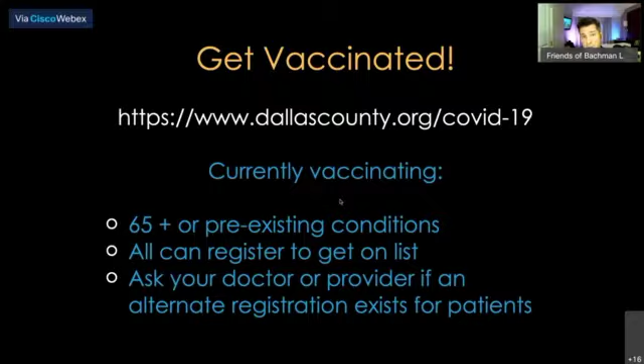Right now, people over 65 and with pre-existing conditions are on the priority list for vaccination, but everyone can go ahead and register to get on the list. Eventually, you'll be called to get your vaccine. You can also ask your doctor or medical provider if there is an alternate registration that they provide for their own patients. But you can not only just go on the website, there's also a phone number you can call for those without internet access or for those who would like to interact with a human being.

And that is 1-855-IMMUNE9. That's 855-466-8639. That is staffed from 7 a.m. to 7 p.m., 7 days a week in both English and Spanish. So again, that's 1-855-IMMUNE9 if you would rather get registered for a vaccination over the phone.

There are also what are called vaccine hubs being set up, and these can change from time to time. But this link here, which we will provide on the Facebook feed as well, will also guide you toward places in other counties and throughout the state, because you don't have to reside in the county where you get vaccinated. Dallas County and the city of Dallas are setting up different locations for vaccine hubs for people to get vaccinated.

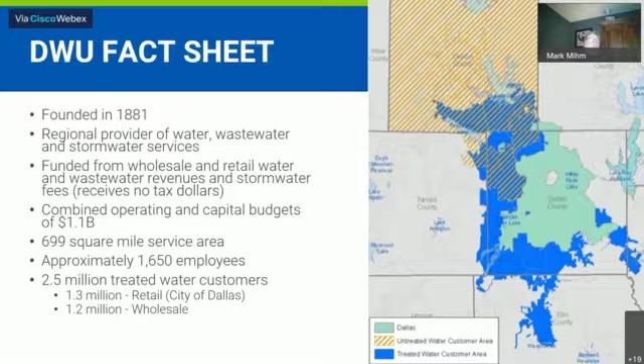The project team: Estella Ornelas is our community engagement specialist, and she's very vital on this project with getting the word out on our progress and what's going on. Mark Cottingham is my boss, a senior program manager with Dallas Water Utilities Water Facility Program Management. I'm a project manager in that group, my name's Mark Mihm. So the dam was built in 1901, a long time ago.

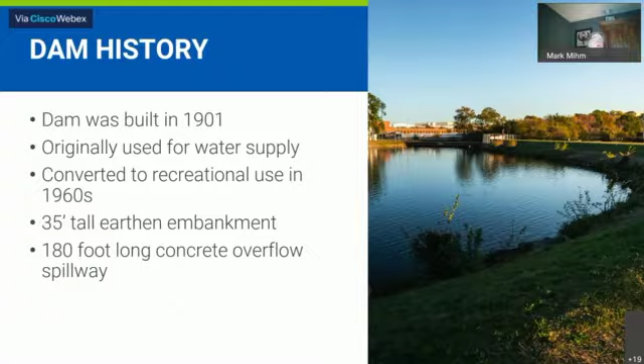Initially this was a water supply for a small growing community called Dallas. It was originally used for that, but was quickly realized to be undersized for the growing population. It was converted to recreational use in the 1960s. The earthen embankment of the dam is about 35 feet tall, with a 180-foot long concrete overflow spillway.

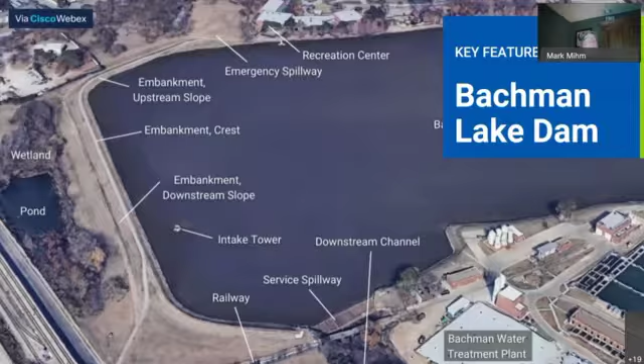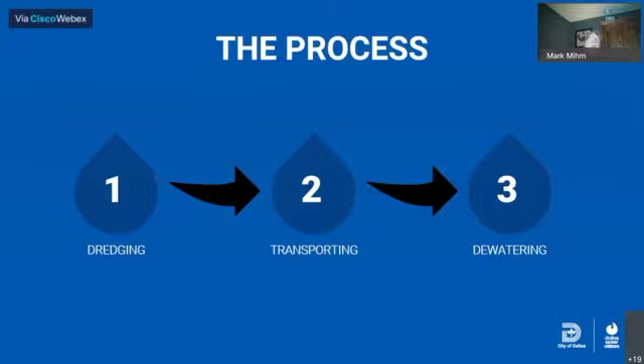So why are they important? First, let's talk about dredging. Dredging is a process where sediment is dredged up out of the bottom of the lake. It can be done several ways. The sediment is transported, dewatered, and finally transported again to a disposal site such as a landfill.

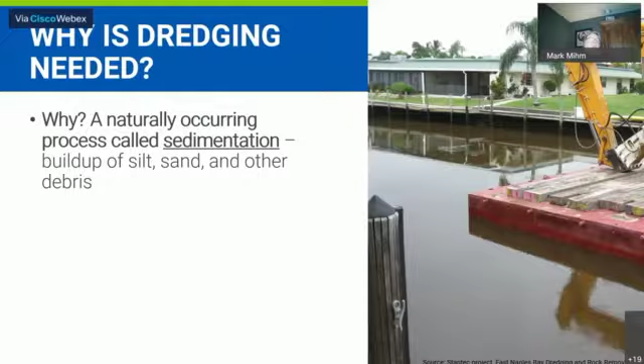Why do we need to do this at Bachman Lake? Well, creeks erode, and as you've probably noticed, our storms have been more intense, so erosion has gotten worse. And as development occurs, there's more impervious area, which means more runoff going to the creek. So it's an exacerbating issue. That sediment is transported downstream to where the water loses energy, and when that happens, the sediment settles out and builds up. And that's what's happening in the lake.

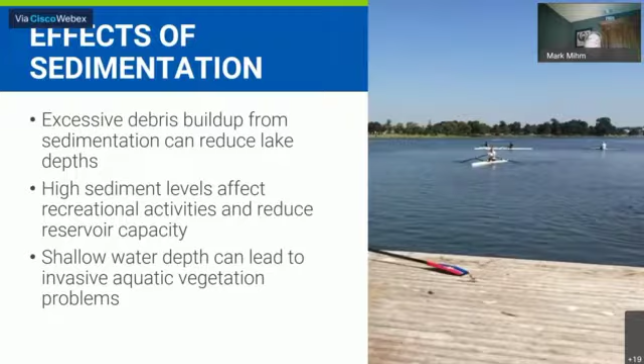So what are the effects? Well, it affects a lot of things. It affects recreation, because it reduces the level of the lake water. In fact, the lake can completely fill in if we didn't dredge it. There's high sediment levels that affect fishing and recreational activities, but also when you get shallow water, invasive aquatic vegetation can take hold, and that can be a real problem for lake maintenance. So we want to try to avoid that if at all possible.

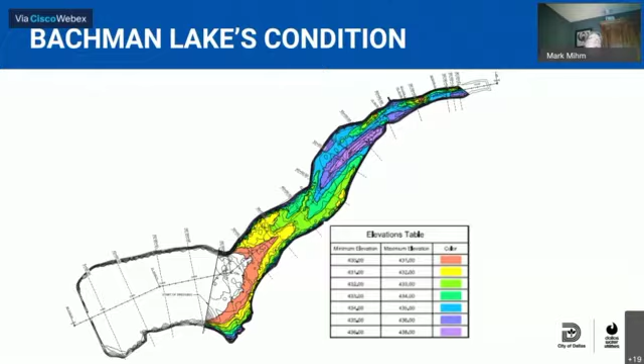Here's a slide that shows the water level depths. Where you see the violet or purple color, that's real shallow. In fact, that light purple is an island that's formed in Bachman Lake as a result of sediment buildup. It's mostly in the upper reaches of the lake where, like I mentioned, the water loses its energy of carrying the sediment and it sinks to the bottom. So those lines drawn on there are cross sections that we used when we surveyed the lake to determine how deep the sediment was.

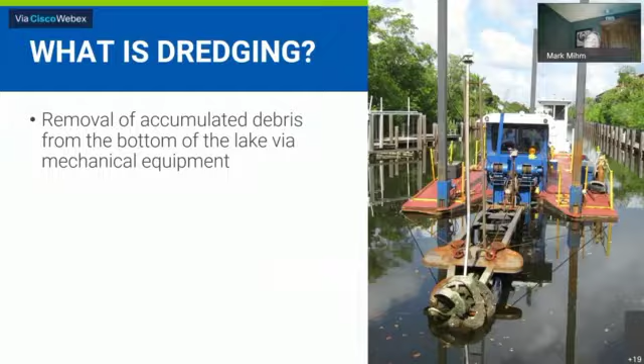So what is dredging? It's a removal of accumulated debris by mechanical equipment. So let's watch this quick video.

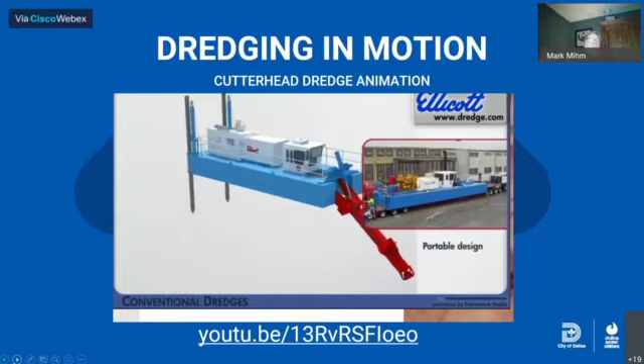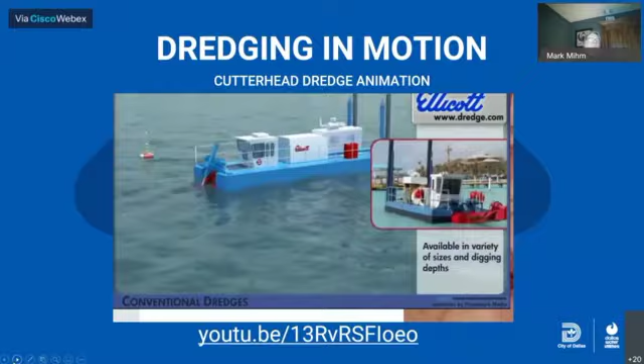This is one company that makes dredge barges, and the barge that ends up at Bachman Lake could look like this. There's several configurations of barges, but they generally do the same thing. It's portable, it floats, it can be moved around the lake because it'll have to be moved. There's a cutter head that moves along the bottom, and the sediment and mud is pumped up and through a pipe to a dewatering area where the dewatered sediment can be loaded onto trucks and transported off-site.

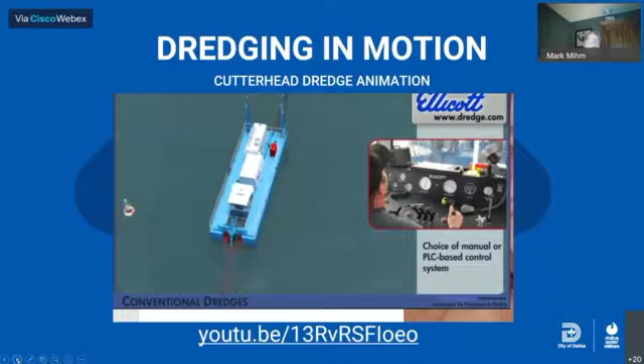The dredge operator works back and forth and controls the depth of the dredging operation, and the goal is to have the lake level lowered to be at least 8 feet deep. That'll give us enough time between the next required dredging of the lake and prevent aquatic vegetation from infesting the lake.

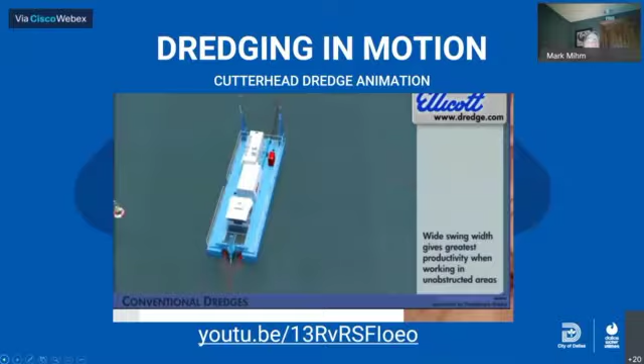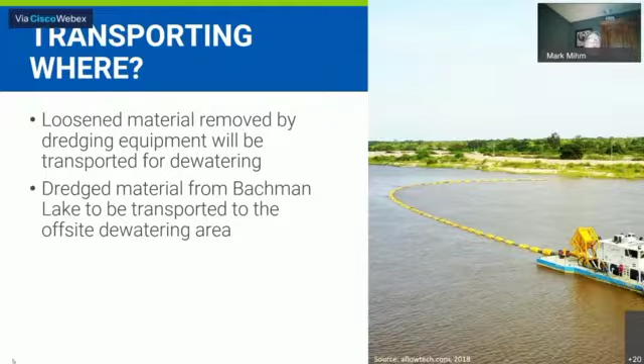So when sediment is dredged, it's pumped from the dredge barge through a floating pipe. I'll show you where that's going to go here in a minute, but it's transported that way to a dewatering area. With the floating pipe, that is going to impede rowing in those areas where the pipe is, and that's just the way it is on the upper reaches of the lake where we're going to be dredging. That'll be in place during the entire time of the project.

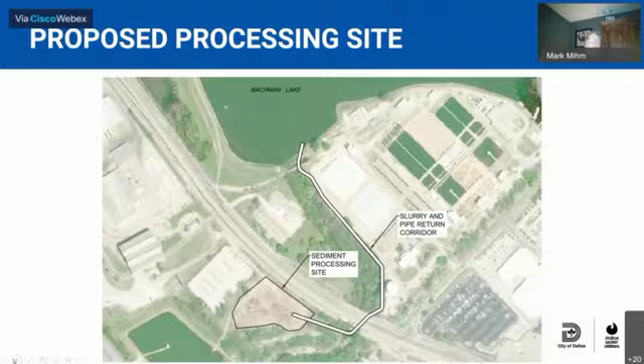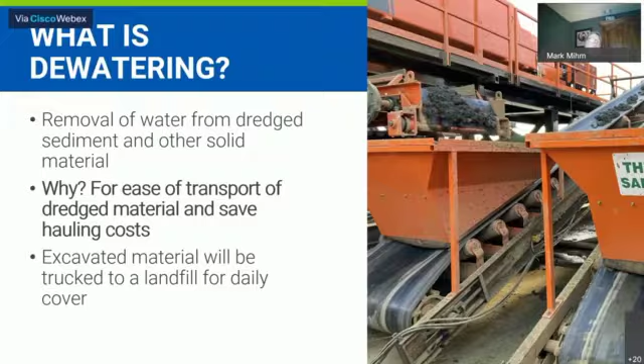So what is dewatering? Well, the sediment is going to be a slurry of water, mud, and silt. It's dewatered in a couple different ways. It could be done by centrifuges, like shown here in the photo, or with a belt filter press operation, which squeezes the water out of the mud. We do that to reduce the weight and load trucks more efficiently, reducing the costs for transportation to the disposal sites. It'll be trucked to landfills for daily cover material.

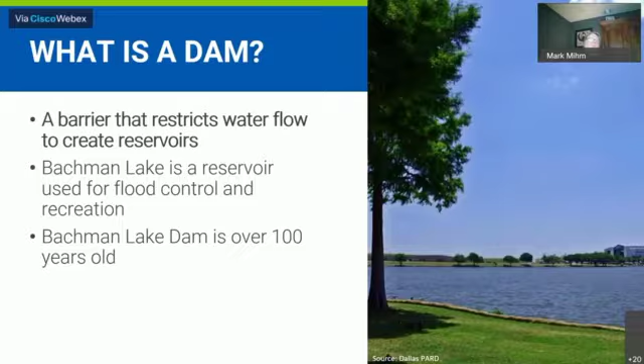So on the dam, what is a dam? Well, a dam is a structure, a barrier that restricts water to build up a reservoir, used for flood control and recreation. Bachman Lake Dam is over 100 years old. The reason we're doing this is for maintenance of the embankment and the spillway. The spillway has become overgrown with trees in the center of it, and that impedes stormwater flow during high flow events. We need to be able to move the water and not back it up to where it can undercut the spillway itself, which is a danger.

And it protects the downstream property and infrastructure also from overtopping and flooding.

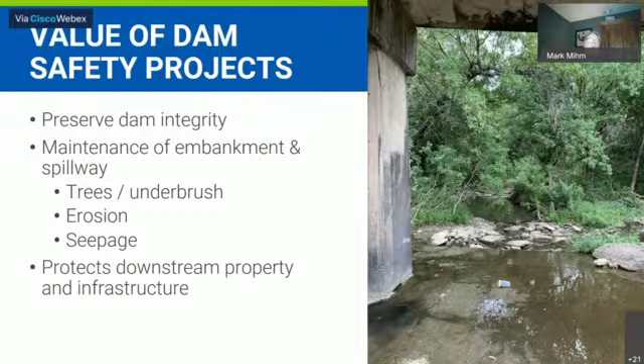These are some common dam issues. We're not saying that Bachman Lake Dam has all these, but it has some of these items. These are common. All dams have some issue or another.

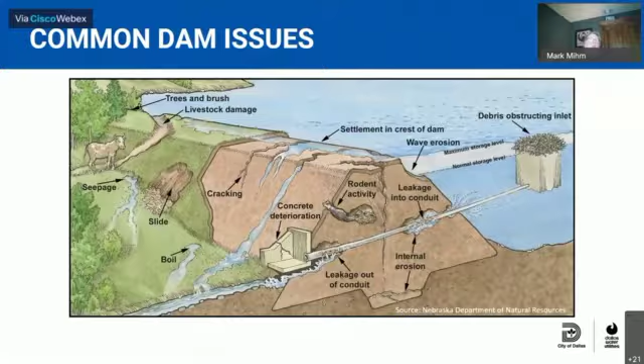There are some seeps and some boils in Bachman Dam. It's nothing unusual. There is some concrete deterioration of the spillway itself and some cracking. That's one reason we're replacing it. And there's been wave action along the embankment.

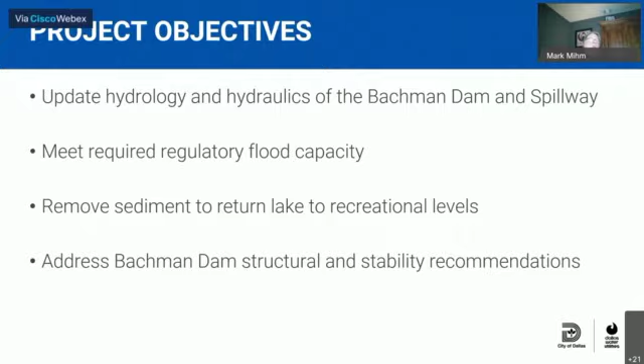So the project goals and timeline. One of the objectives is to update the hydraulics and hydrology of the Bachman Dam and spillway. We have to meet the required regulatory flood capacity from TCEQ. We're going to remove the buildup sediment in the lake to return it to recreational levels and address Bachman Dam structural and stability concerns that we have.

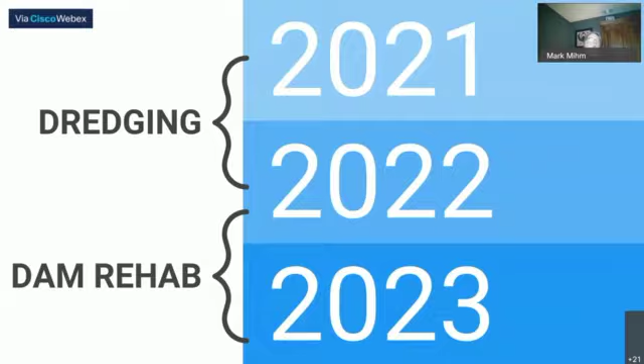So essentially, this is a broad schedule. Dredging will take place starting this summer in 2021. It'll continue through 2022. And around that time in 2022, the rehab of the dam itself will start and the work will be wrapped up in the summer of 2023. A more detailed look at the schedules next.

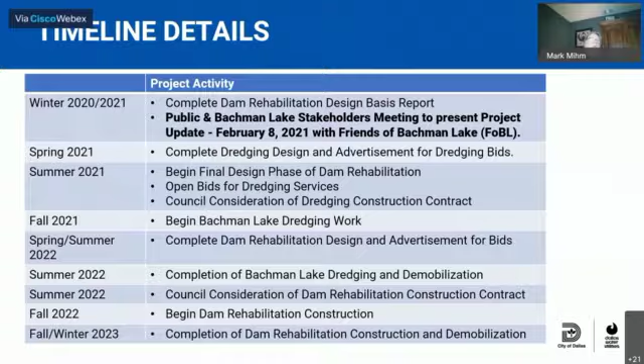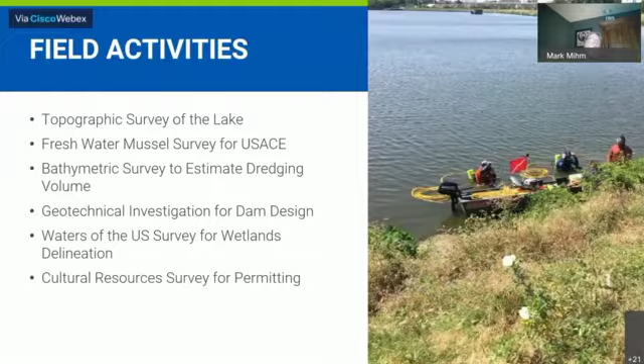A bathymetric survey was done to estimate the quantity of the dredging volume. Geotechnical investigations are needed for the dam design. And finally, both surveys were done for waters of the U.S. for wetlands delineation and cultural resources.

The good news is all this field work paid off. We were able to get our permit for dredging from the Corps of Engineers. That was obtained in December, and we're very happy about that. It was a fast turnaround on the permit because we've done all that legwork.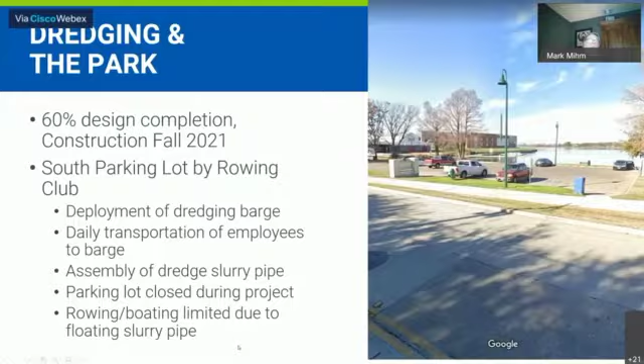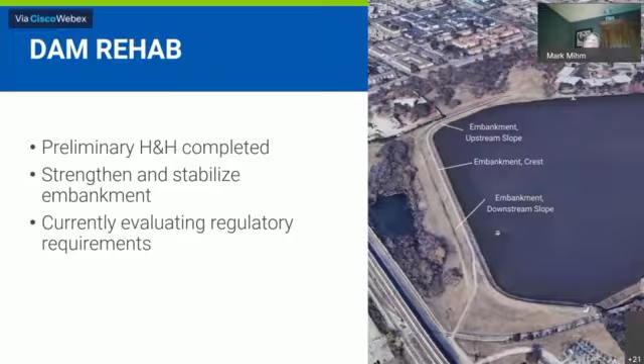The dam rehab - we've completed the hydraulics and hydrology study, the preliminary study on that. The scope of the work is to strengthen and stabilize the embankment. And we're currently evaluating the regulatory requirements to make sure we get it all properly done. I mentioned the service spillway - this gets replaced, and we're looking at options for that.

Finally, in community engagement, we've been busy. We have a website, BachmanLakeDam.com. It's a nice looking website. There's a lot of information on there. Please log in and visit that website.

Rogue Water has set that up for us. In there, you'll find the latest news. You can sign up for notifications, and you can also ask us questions through that website, and we'll respond. We're also communicating through Facebook and Twitter. So keep in touch. You can email at info@BachmanLakeDam as well. You can visit our website or any of these other public information channels.

So let's talk now. I'm going to turn this over to stormwater operations.

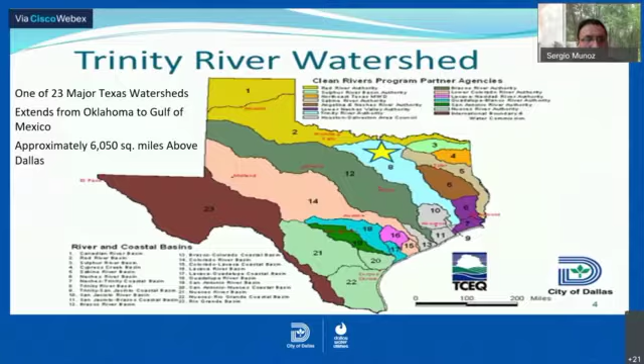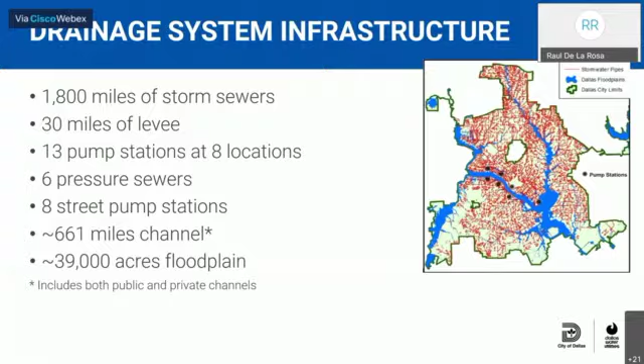The drainage system infrastructure has about 1,800 miles of storm sewers, 30 miles of levees, about 13 pump stations at 8 locations, 6 pressure sewers, and 8 street pump stations, 661 miles of channel, and about 39,000 acres of floodplain, including both public and private. I'm going to turn it over to Nusrat Munir for the water quality.

Thank you, Sergio. I'll dive directly into my slides. The team collected samples according to the plan designed for Bachman Lake, and EPA protocols were utilized to determine the water quality of the lake while comparing upstream and downstream locations.

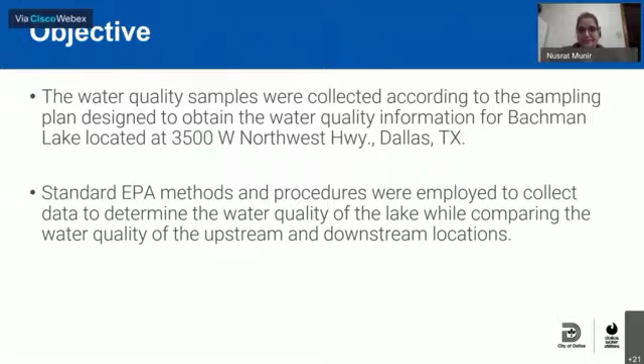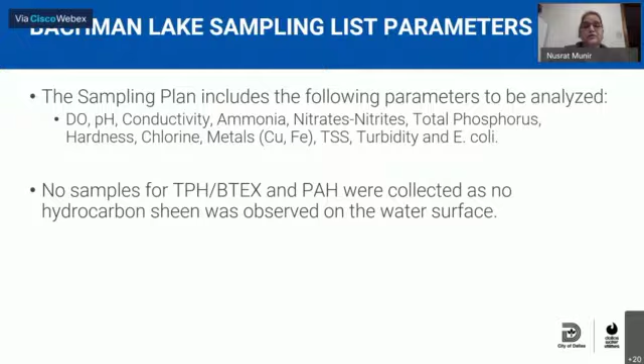According to the sampling plan, we collected dissolved oxygen, pH, conductivity, ammonia, nitrates, nitrites, total phosphorus, metals, total suspended solids, and E. coli. No samples for TPH BTEX were collected because no sheen was observed during the sampling events.

This project started in January 2020. At that time, samples were located downstream at Denton Bridge and right in the center of the lake. For the first 6 months, the water quality was compliant.

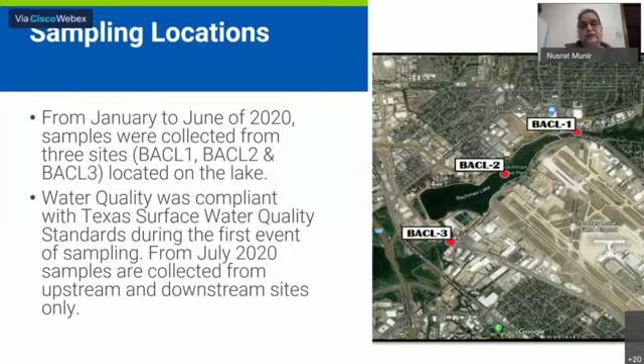From July on, we were just sampling upstream and downstream sites, only 2 sites collecting samples from. This is all the data from January till December of this year that we have collected, and hopefully it will be posted on Facebook for you to take a look at.

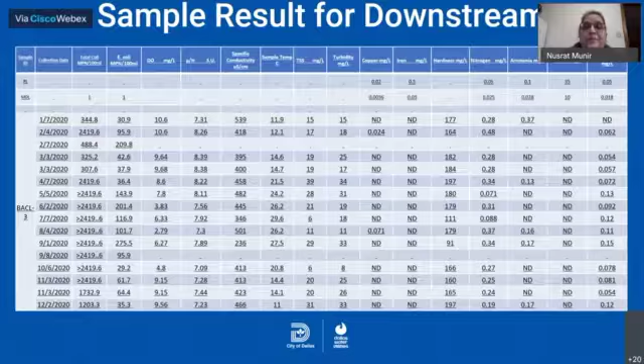Next slide, please. I've done some statistical analysis for bacteria, for a single sample, according to Texas surface water quality standards, which accept 399 colonies per 100 mils.

We can see for Bachman Lake upstream in July and in September there were some spikes. In September there was definitely a qualified rain event that could have contributed to elevated levels of bacteria. Downstream, all the samples were compliant, less than 399.

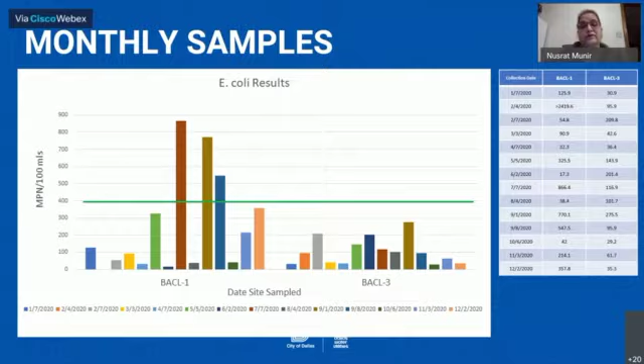The geomean, because of the spikes for two events, exceeded the acceptable level of 126 colonies per 100 mils, but downstream was compliant.

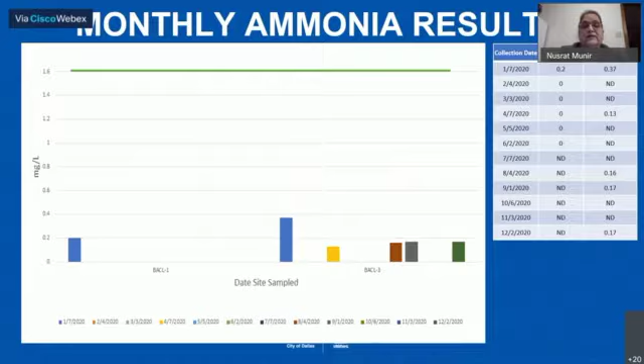The acceptable level for ammonia is 1.7, and all the samples were either non-detect or had only very minor hits. This tells us it was not sewage water that was in the creek.

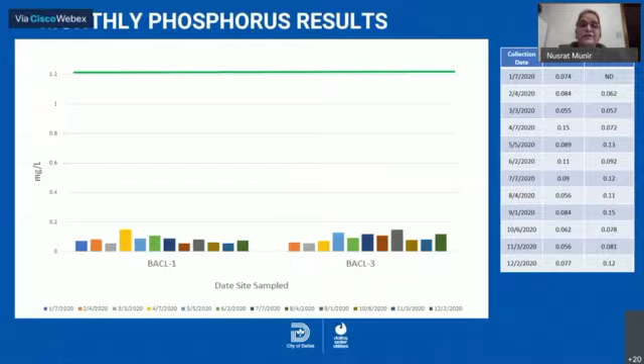Also, the acceptable level for phosphorus is 1.25 milligrams per liter, and all the samples were compliant. For nitrogen, upstream we see some spikes, which could be because of leaves decomposing in the creek contributing to high levels. Downstream it was all compliant.

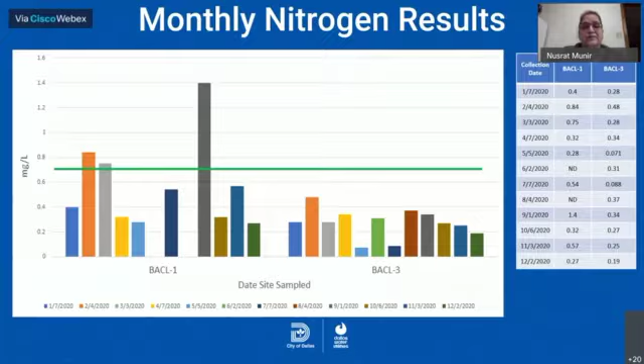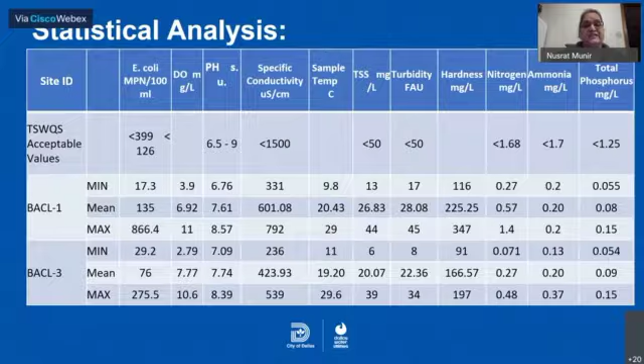According to the statistical analysis, the mean for all samples was well below the acceptable levels, except for bacteria. Upstream, the geomean was 135 instead of 126, because of the two sampling events that were elevated. The statistical analysis determined the water quality of Bachman Lake was compliant with Texas surface water quality standards set by the TCEQ.

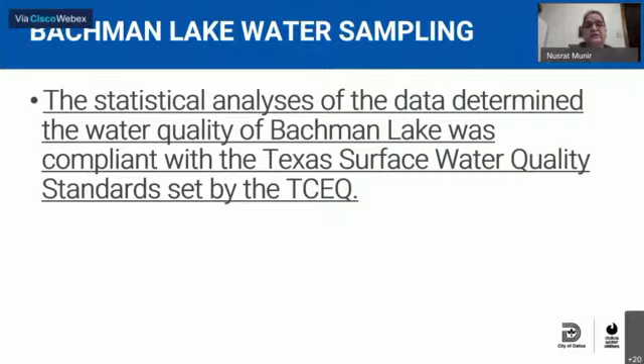These are the analyses that we use to build a plan for water quality. Back to you, Sergio. Thank you, Nusrat, for that.

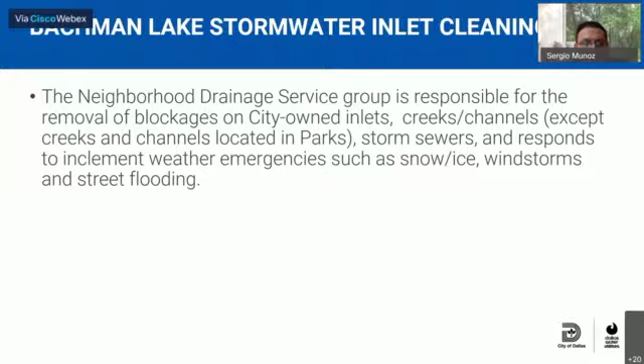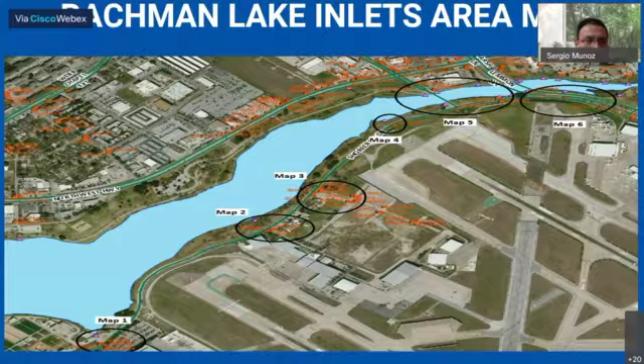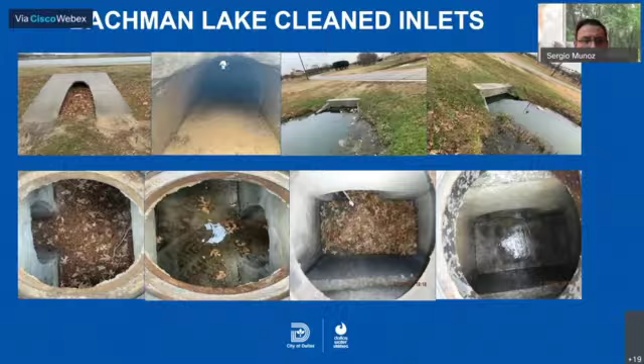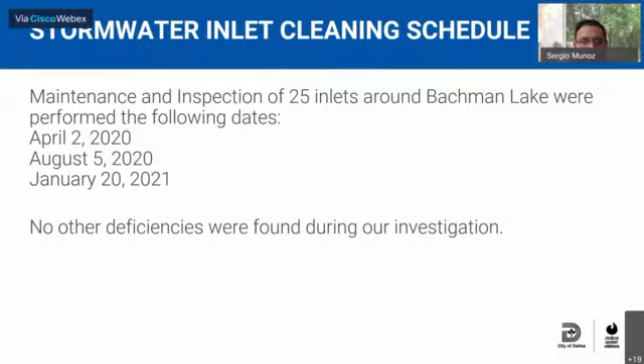Nothing seemed to have any structures or anything in danger of causing problems, just basically some leaves, and a total of 25 inlets were cleaned all around. These are the dates, the last being January 20th this year, and no other deficiencies were found during our investigation. I'll turn it over to questions.

Thank you. We have a few questions that have come from Facebook, one of which was answered, but regarding the spillway itself, we've been told that the dam won't be any higher because there were concerns about the volume of water and how that would be affected. But will the spillway itself be higher when it's rebuilt?

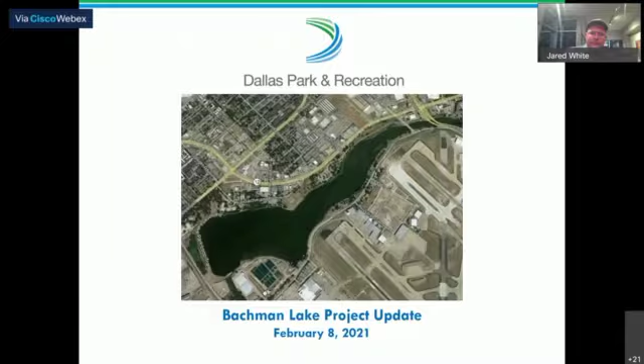So tonight, I'm Jared White with the Park and Recreation Department Planning and Design Division. We're going to give some updates on a lot of projects going on around the lake: the recreation center, the aquatic center under design, the skate park, the QuikTrip trailhead on the eastern side of the lake, and the Greenbelt Trail we're working on with the Friends group.

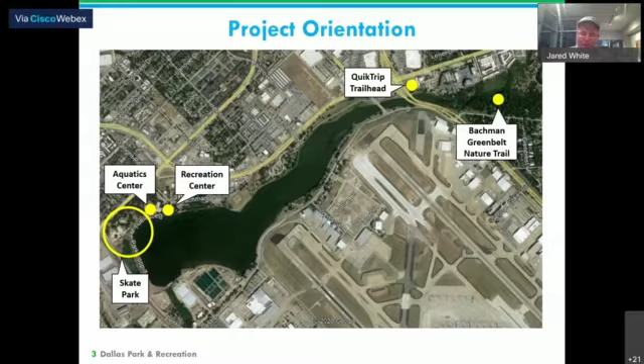So here's the distribution of those projects. A lot of them are over on the northwest side of the park near the spillway, and there's a few also on the eastern side of the park. Excuse me, sorry, I was fine until I started speaking, now I'm getting all stuffy here.

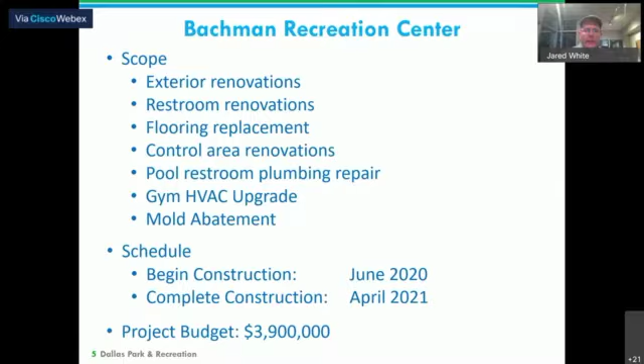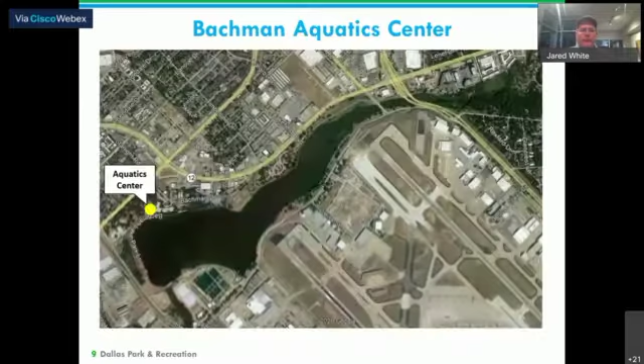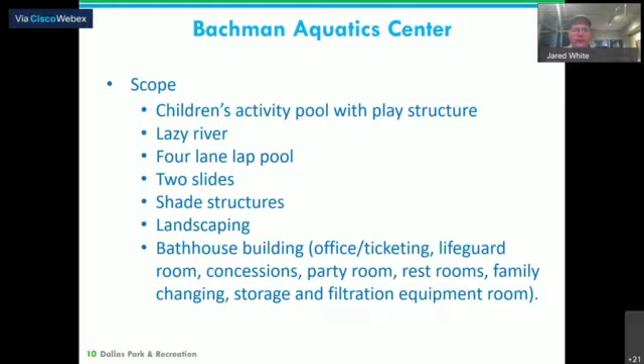With aquatics, the aquatic center is in design on the western side of the park, over near the recreation center itself. It's going to have an activity pool, a lazy river, a 4-lane lap pool, 2 slides, shade structures, landscaping, and a bathhouse facility.

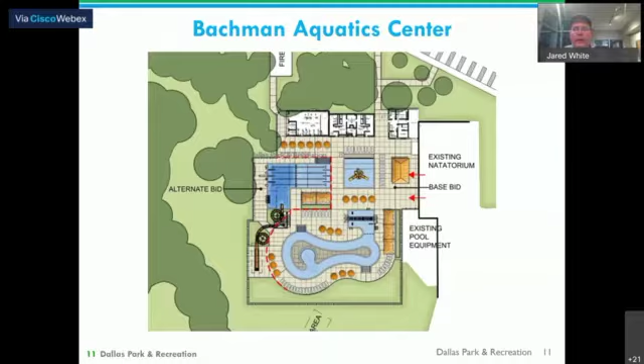Here's a very general rendering of what that site will be. In the white, nebulous area off to the right, that's the existing building it's adjoining to. Then you can see the different facilities included in the design, being the lap pool, the play features, and the lazy river.

And we are currently waiting—it's in design now, we're working on getting through the permitting process. Once that's finally approved and we're approved to move forward, that's going to be about a 9 to 10 month construction schedule, and that's a project of about 7.2 roughly million there.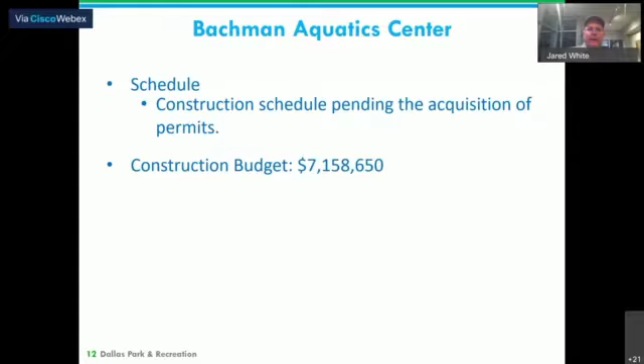So we'll start our work with Dallas Water Utilities and stakeholder groups, and there'll be more to come with the skate park. I didn't know if there were some other comments on the skate park, if anyone else wanted to comment real quick, or otherwise I can keep going.

We'll go ahead and let Clinton Haley talk about the skate park once you're done with your presentation here. Okay, great. We can pick up any questions.

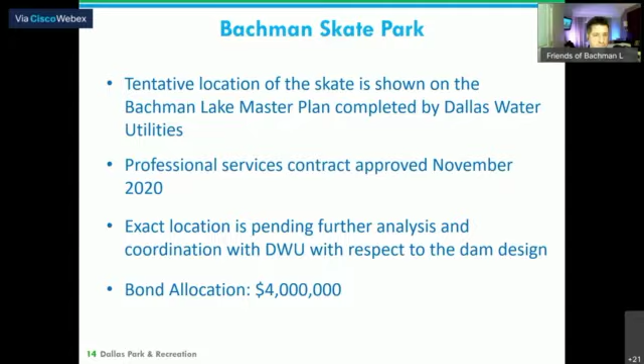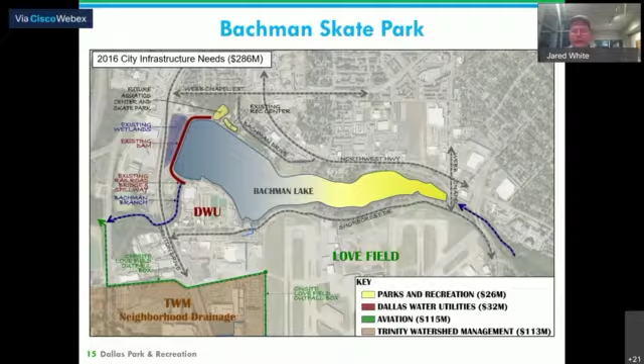Great, I just have a few more slides here. Again, here's just a map of the lake. Again, we're looking over on the western side of the park in coordination with Dallas Water Utilities and their dam reconstruction project. Working with QuikTrip, we got this update from QuikTrip yesterday.

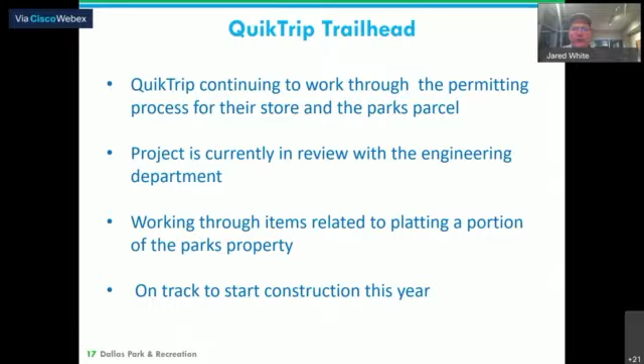They're still working through the permitting process and platting, and they're hoping to go to construction this year. I didn't get a start date, but they are through our internal processes, and so they will start that construction.

And this is not the best graphic, but in the larger graphic here you can see Northwest Highway and Lemmon. The facility will be on that southeast corner, and they're going to provide a trailhead, sidewalk down to the trail itself, and some other improvements that will serve as a trailhead facility off of their project site.

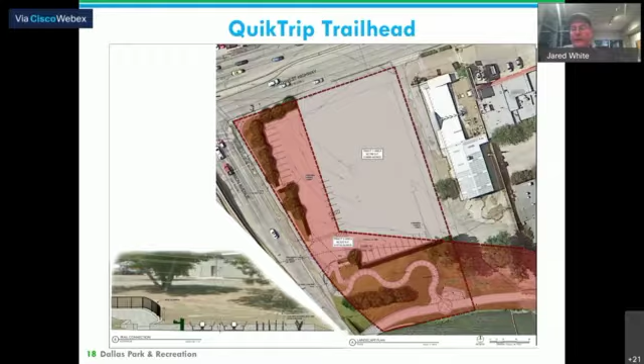And then the Greenbelt Trail—we are still working with the Friends of Bachman Lake on this. The Park and Recreation Department, the Park Board, approved this, the funding, their match funding, back in November.

And so now we're working with groundwork and working with the Friends of Bachman Lake on some preliminary work on clearing the site, doing some alignment work. There's been conversations with our maintenance staff on how we can cross the creek in that greenbelt area. So yeah, we're very early on working on this, and we'll have some more updates as we move along here, but this is already getting underway.

This is just kind of preliminary alignments of the greenbelt itself. For orientation, Shorecrest is the roadway running east-west on the southern part of the map, and Lemmon is on the lower left. We have two alignments, about a mile each, roughly, one on the north side of the creek and one on the south. You'll have opportunities to walk back and forth along each side of the creek, and we're looking at ways to get across the creek itself.

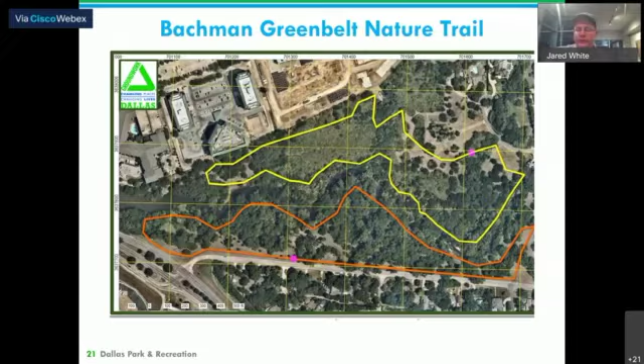Here is my contact information should there be any additional questions. Thank you.

Great, thank you, Jared. We did have a question about the rec center, which looks awesome, by the way, is the comment, and I tend to agree with that. Can we get some guidance thus far on any restrictions due to COVID once it does open?

So, Leon, I saw you might be on the call. I don't know if you can provide any additional information on that, or perhaps Calvert.

As far as I know, we have shortened the hours on some of the rec center. Unfortunately, Crystal's not here, and she has the latest schedule. Because of COVID, some of the group activities have been greatly reduced or temporarily postponed. We'll have it posted when we get a new schedule, a new plan. The recreation sites are normally posted on the city's park department, dallaspark.org site, and there's a schedule there. Whenever we have a facility open, or we have to close it due to COVID or shorten the hours, that kind of stuff.

Thank you. Appreciate the answer.

Thank you. We're pretty excited about this skate park. There are a lot of possibilities, and we have Clinton Haley with Skate Parks for Dallas to speak a little bit about what's possible and how things work. So Clinton, the floor is yours.

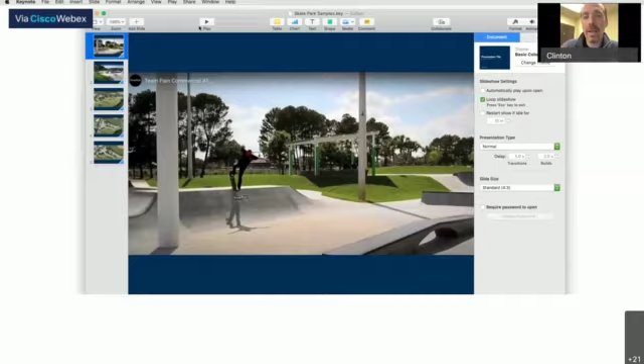Thank you for that. Some of y'all might recall that my counterpart, Nick DiCarlo, and I went out to one of y'all's neighborhood association meetings at the bank building pre-COVID, maybe 2 or 3 years ago. After the bond program approved the skate park at Bachman Lake, we presented a conceptual idea of what a modern skate park is and what benefits that might bring to the Bachman community. For those who weren't there, we thought it would be a good idea to get some slides up to show you what a modern skate park might entail.

These are pictures of a recent park built in Florida by the same design firm that was just contracted, as Jared from Parks pointed out, at the end of this past year. This one is designed by Team Pain. If you'll notice, yeah, there is some concrete, but the nice part about skate parks today is that not only does the community like trees and shade, but so do skaters, especially in Texas, right?

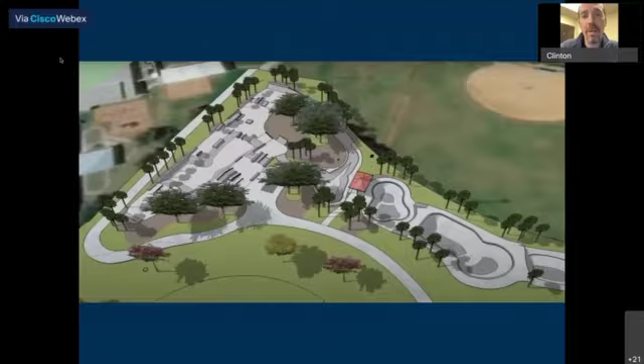So picture your son or daughter, or even you, going to a modern skate park. We really want to try to make this design include something for everyone. Sure, the main thing is for kids and skaters to have fun at the park and be challenged and have a good source of recreation, but also for neighborhood members to be able to come out and enjoy a nice modern park, as well as shade features and places to sit and watch as skaters do their thing.

Team Pain is the design firm that was contracted by the city, and as a skate community, we're real excited for that. Team Pain has designed and built the majority of parks in Colorado, as well as in Florida, and they've all been received very well by those communities. I think this will be a great combination for Dallas and for the Bachman neighborhood in providing a really neat and exciting park at that corner of the dam there near the recreation center.

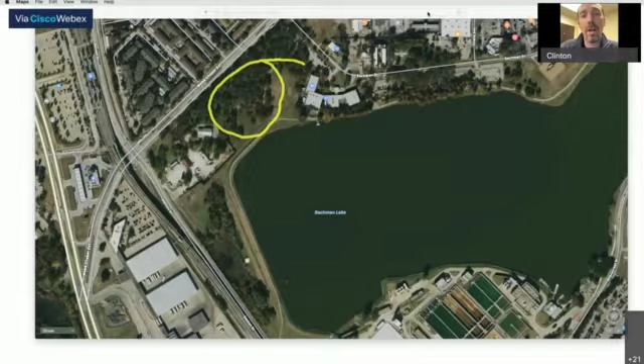Skateboarding, particularly in the Bachman neighborhood, is going to be new for some. We know from skate parks built in other communities that as soon as they're built, kids find them and enjoy the recreation. To build awareness and excitement, working with committees including Michael, Susanna, school board rep Joe Carey, and Tim Dickey, we're working with Skate Parks for Dallas to raise money so that when the park opens, we can get about 100 elementary school age kids, maybe 10 from each surrounding school, free lessons at the new skate park as an introduction to what this new park might bring. We're excited about this collaboration between the Neighborhood Association, Skate Parks for Dallas, and the city to get those funds before the park opens.

That's our latest update, and I'm really excited for this next phase. Over the next several months, Team Pain will do geotechnical studies, looking at the soil, talking with Dallas Water Utilities and the folks rebuilding the dam. Then maybe early spring or summer, we'll get together as a community for design meetings that Team Pain conducts before finalizing any design. They want input from the community on what we want to see in this park, with a series of meetings to provide information and get feedback before a final design is confirmed.